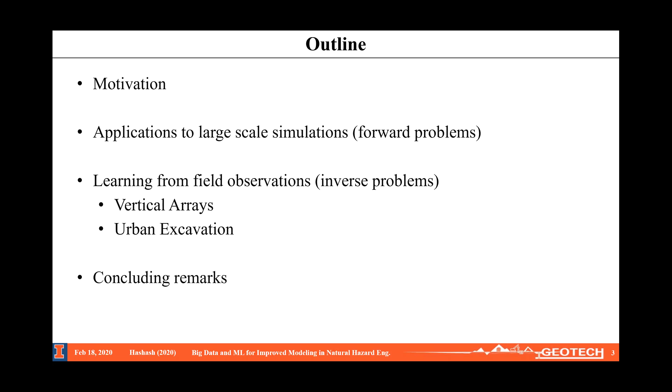First, I'm going to give you motivation. Then I'm going to apply it to a forward problem using large-scale simulations, learning from field observations, inverse problems. And I'll have two examples, vertical arrays and urban excavations, and then some concluding remarks.

So what's the motivation? The motivation is nowadays we're able to do ever larger, bigger, massive simulations. And the idea of asking our students to get the data, put it in an Excel sheet and come up with some correlation is really not viable. You've seen the machines here. We actually use them extensively. We're able to generate very large data sets. What can we do with this data set to be able to develop reliable risk-based design and models? We'll talk a little bit about that.

We're acquiring large data sets from the field, and are we using that data to improve our knowledge, to improve our understanding of the fundamentals of material behavior? And I'm going to talk a lot about simulation. We have centrifuge experiments, instrumented buildings. We're looking at using smartphones, terabytes and petabytes of data. What do we do with this? And so let me give you some examples.

So the first one is large-scale simulations. This one is motivated by trying to characterize the site effects for earthquake problems, the impacts of sites on our ground motion. And if you're doing a regional study to incorporate the information in a hazard map, you need to incorporate many, many different realizations and then come up with amplification models.

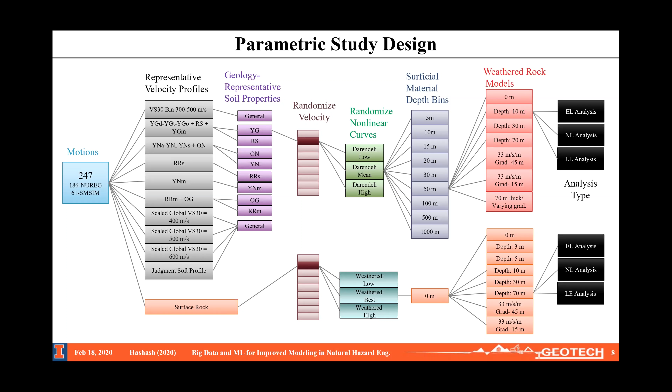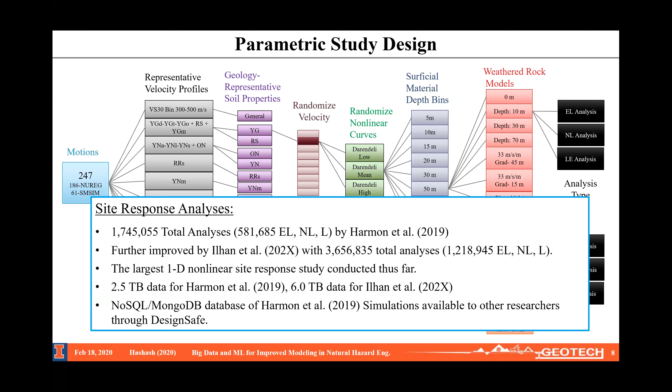The simulation study we have dealt with is very large, to incorporate ground motion effects, soil profiles, material properties, depth to rock, and that resulted in 1.7 million simulations. We're doing a newer study now with 3.6 million simulations, and the output from those is 30, 40 million, and we have 6 terabytes of data. The first set we had 2.5, now we're 6 terabytes, and we put this in a data set. So how do we use that data set in characterizing site effects?

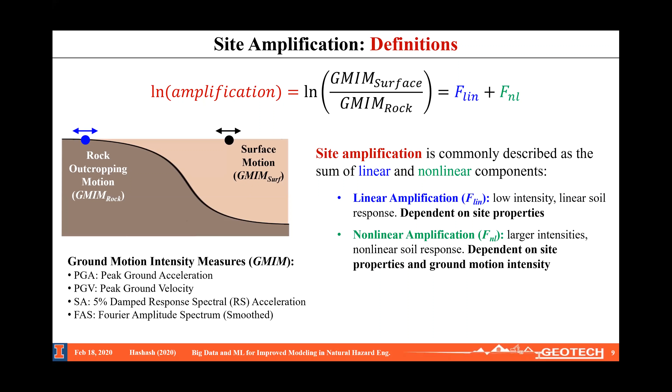We call this thing the amplification factor. You take the ground motion intensity measure at the surface, divided by some input rock, and that embeds, shall we say, the effect of the soil column on your ground motion. And there are linear and nonlinear components.

The functional forms, this is just to give you an idea about the complexity of these. The amplification factor is usually put as a function of shear wave velocity. We call it VS30. This is the slowness parameter of the soil column in the top 30 meters. And we develop these functional forms for it. And then we can add other terms such as the natural period of the soil column to enhance that prediction.

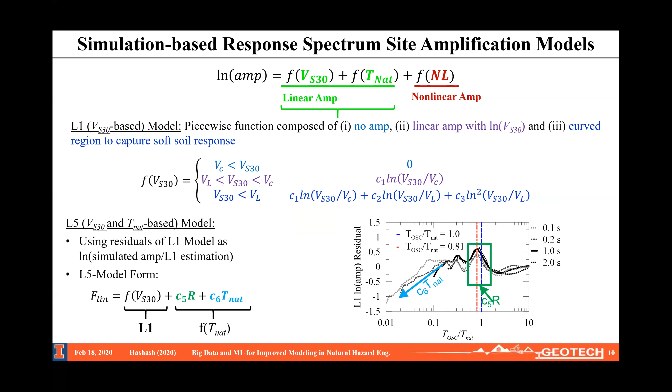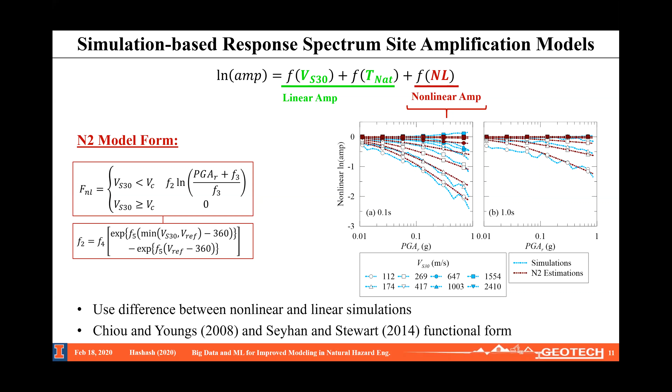The nonlinear form also becomes complicated. There are many terms that you have to bring in to be able to incorporate the soil nonlinearity into your model. And we have published these results. The measure of a model is how well it fits the data it is used to represent. This is a graphic showing you the residuals, and in a good model, you want the residuals to be centered on 0, right? And you can see that in certain parts of the shear wave velocity spectrum, we are really not centered around zero.

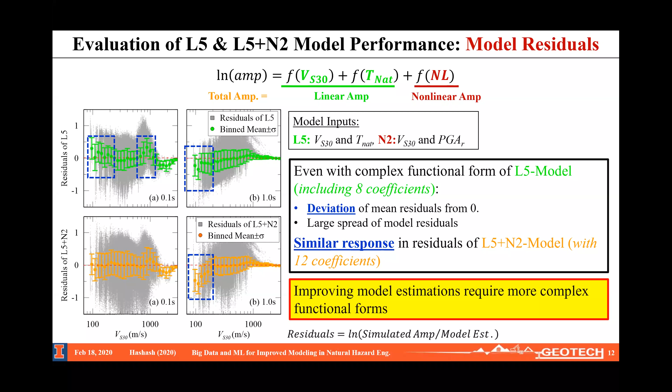So what do we do? Do we add more model coefficients to better match the data? This becomes really unwieldy, very difficult to do, and it's not easy to understand and figure out exactly how I can improve my model. Well, so what did we do? We decided instead of using conventional functional forms, we used neural networks.

The input to the model is exactly the same as any other conventional input we use in our site amplification. Why? Because we want this to ultimately be used by the community of seismic hazard mapping, and we do not want to change the input. Inside, there is a neural network, I think yesterday in the workshop you probably had a bit of an idea about what a neural network is, and then the output is also what they are used to.

The input is the same, the output is the same. It's just the inside we don't know exactly the functional form in a traditional sense. And I always say, do we really care? So we're able to have such a flexible framework or functionality to capture the data.

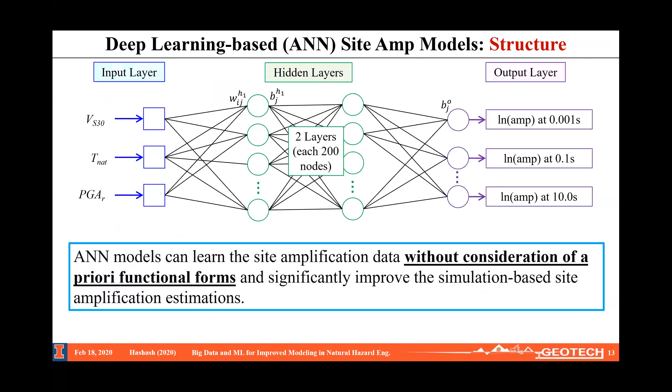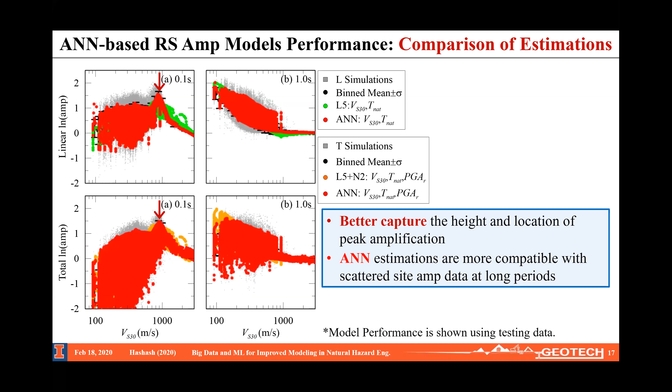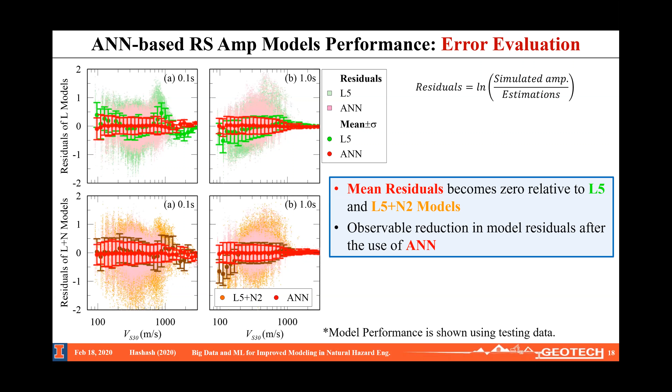And so what we did is then we trained it on the same data set that we used to regress the conventional models, the exact same data set, exact same thing. And we are actually doing a much better job in terms of capturing the trend and the width of the trend. And then if we look at our residuals now, compared to those of the conventional functional forms, they are centered on zero. And also the band, the sigma, is smaller, by the way. So this means you have a smaller error.

And if we look at it in a root mean square error, and this is for the linear function and the linear amplification and the total amplification, we have somewhere around 30% reduction of error. Now, why is that important? This is 30% in log scale, by the way. So from an engineering point of view, this reduction in error is massive. It's hugely important for us because it's giving us a far more reliable functional form to use for site amplification.

So it's an example of how we apply artificial neural networks, large data set simulation data, and put them all together to be able to improve our models that are used in engineering applications. The artificial neural network work is still in progress. We haven't deployed it yet, and we'll have to convince the USGS to ultimately use it as they did our previous models. But the error, you really cannot argue with the reduction in the error there.

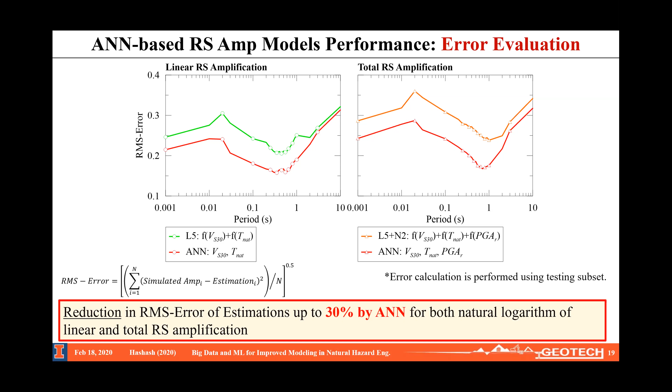Now, why do we care about these things? Because we're going for ever larger simulations. This is a large-scale simulation that we are currently working on with one of my PhD students, whereby we're looking at the interaction of tall buildings with tunnels, underground structures. And we want to build three-dimensional models because we want to do 1- or 2-dimensional shaking. And if you're interested, this is LS-DYNA, and we're running it here on these machines.

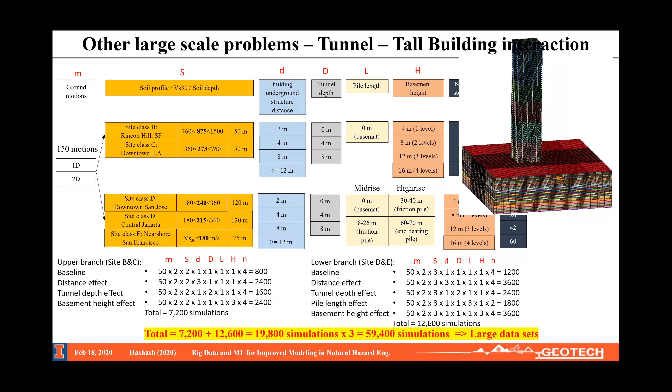We're going to have around 59,000 simulations. And if you know about finite element modeling, you have X number of nodes, X number of material points, integration points. So we're going to have a very, very large data set, and we plan to use artificial neural networks to be able to do our evaluation of these results. And ultimately, in how you carry that through in terms of your risk calculation, there's another project I'm involved with where we are trying to do that, and these tools will be very handy.

Okay, now I'm going to switch to another problem. The first was the forward problem. I'll give you an example of an inverse problem, learning from observations. This is self-learning simulation, a technique we have developed at the University of Illinois for quite a few years. And the way you want to think about it is, how can I develop a large data set from limited field observations? You see, our field observations, especially for the earthquake problem, are always limited. We have a few points here and there.

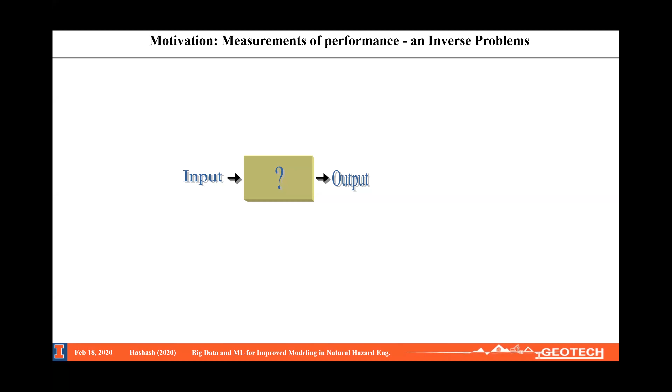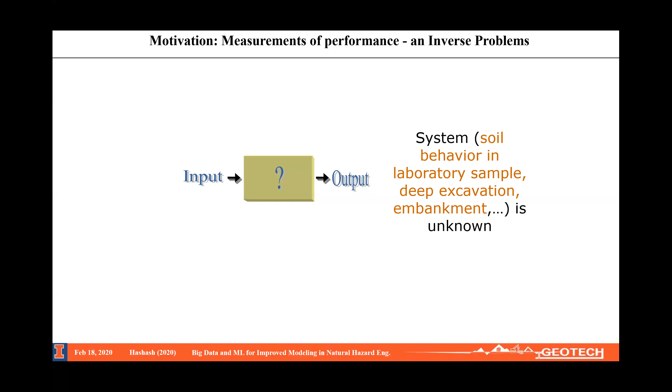But how can I get something more out of that data by bringing in other considerations? So we have an input and we have an output, and we do not know the guts of it, the mechanics of the problem. That's the unknown for us. That system behavior could be material behavior, a laboratory sample, a deep excavation, vertical arrays. The way we often do our modeling is we have a finite element model, we have a mesh, and we have a material constitutive model, linear elastic, nonlinear hysteretic model.

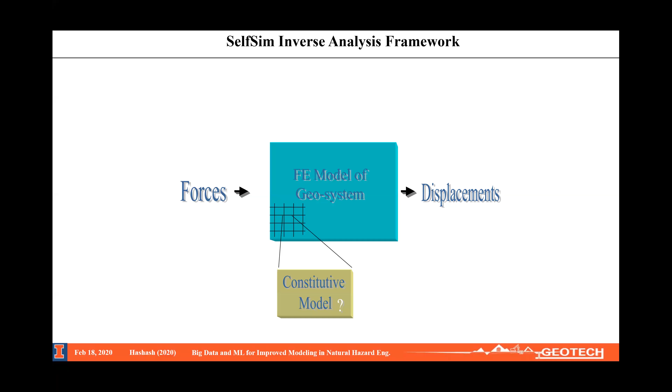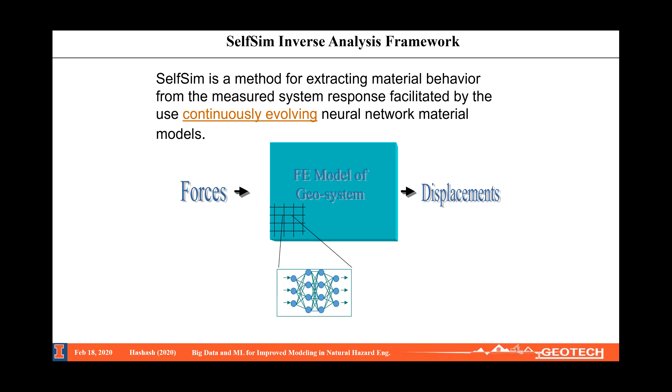Now, we have a force and we have a displacement. We have our constitutive model. Especially for geotechnical engineers, that's the unknown quantity. And instead of using a conventional hyperbolic constitutive law or a bounding surface plasticity model, I'm going to propose that we use a neural network-based material model, not a conventional material model. Why? Because if you look at our literature, the constitutive models out there are a dime a dozen. I have contributed my fair share to those models as well. But changing to that requires a change of thinking. So let's look at how we're going to do that.

So I'm going to take vertical arrays. With vertical arrays, you put some sensors at the ground surface and within the soil profile, and you have a shaking event, and you are able to see the wave propagation, and you try to simulate it to understand the material behavior. Well, it is fundamentally an inverse problem. If we use our conventional models, I have a fixed form of my constitutive model, and I try to tweak it and do some ad hoc changes.

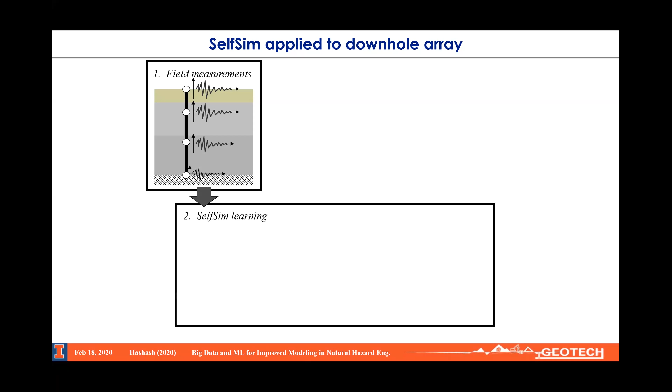We call this optimization. You run into uniqueness problems, etc. But there is more information in these models that we can do a better job extracting. So instead of running a single forward analysis with this, I'm going to suggest that I am going to do 2 simulations, right? So I have the records from all these points in the vertical array.

And what I'm going to do is I'm going to first run one simulation here, whereby I'm going to impose the base shaking. And I'm going to say there, because the forces that I'm applying are reasonably correct, then the stresses I'm getting out of it are correct. So I'm going to take these. The strains may not be.

Then I'm going to do another analysis, a parallel analysis, whereby I'm going to put in there all my measurements. And that is going to constrain the problem, whereby I'm going to, more or less, probably get my strain correctly. So I'm going to stipulate that I'm going to get the strain from that analysis. Stress, strain, that's a constitutive model. That's a material constitutive model. It relates stresses to strain.

So what I do is I take that data, but how can I use that? How can I incorporate it? Instead of using a conventional material model, I use a neural network model. From these 2 analyses, I train my neural network soil material model, and I repeat the process. I keep on repeating. I start from something similar to a linear elastic, and I let it evolve, and then I repeat that for all the time steps, etc.

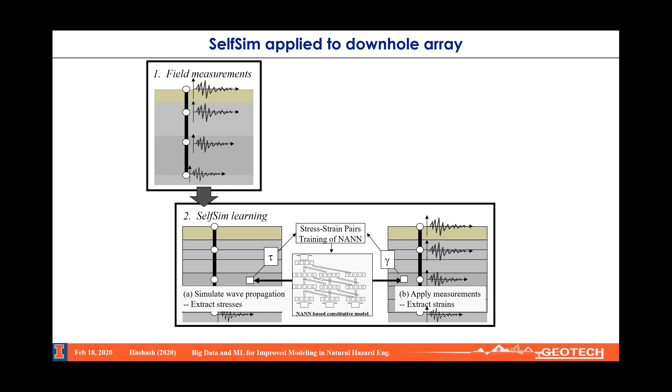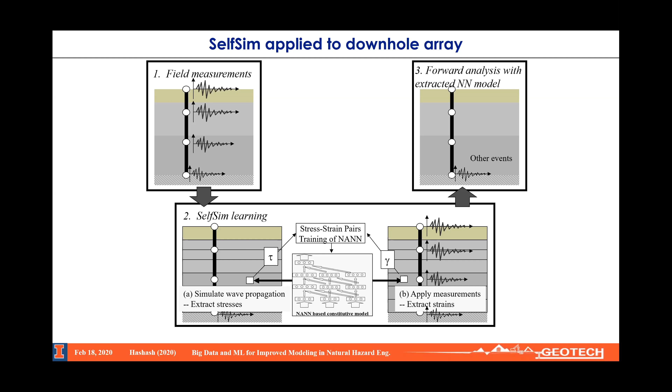You can see it can be computationally a bit demanding until the 2 analyses converge, and then I can say I have extracted out of the measurements enough knowledge that would be sufficient to tell me something reasonable about the material behavior. For your information, we've applied this to multiple problems, structural engineering problems, geotechnical problems, seismic and static. We've applied it also to bioengineering problems as well. And they all work really well. So there's a number of PhD theses on this. I'm just showing one example here.

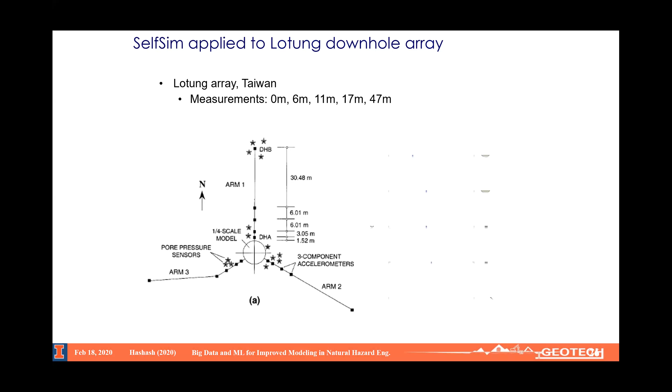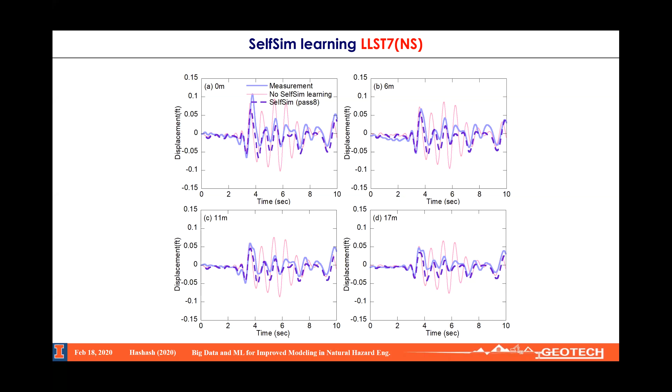Okay, so you say, well, you've matched, but what did you get out of the material behavior? Well, we looked at our soil stress strain loops. They looked reasonable, but let me show you something more. We started looking at modulus reduction and damping curves. This is a classic way of looking at material behavior that we use in site response analysis. Well, what we found is that first we got reasonable modulus reduction and damping curves, even though we didn't use those as an input.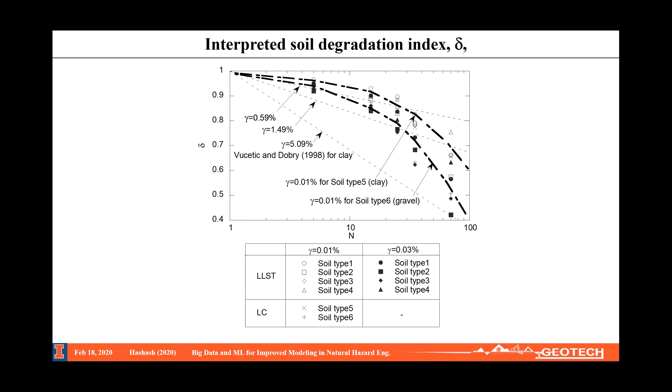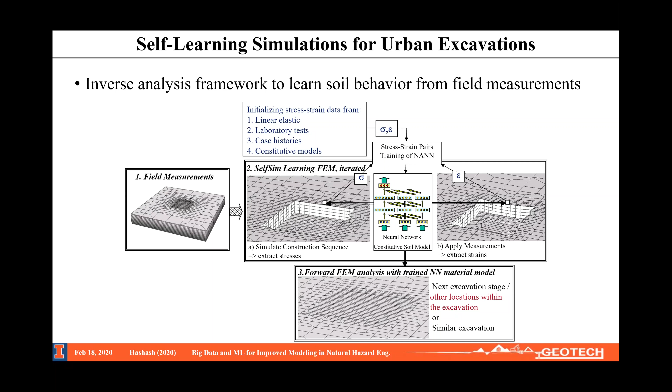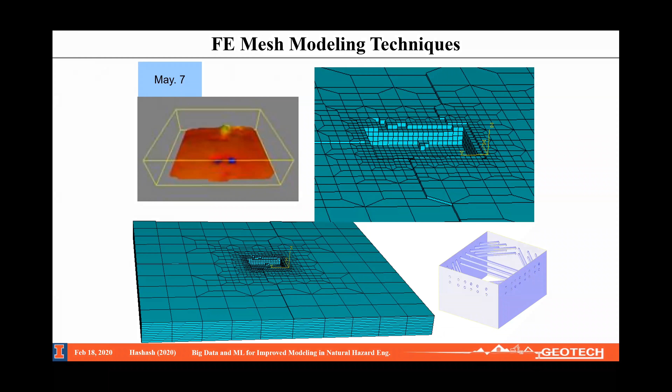I'm going to fly quickly through another example, and this is really to show you how we can incorporate things such as LiDAR or structure from motion information to develop our finite element models and then do this inverse analysis. We did that for an excavation problem, which we automatically converted to a finite element mesh, and then did our learning, and we learned nonlinear behavior. Conclusions.

The age of big data and machine learning is upon us, resulting in improved forward and inverse modeling, learning from observations. We need to shift our thinking, actually, think differently. There is a pressing need, in my opinion, to upgrade our toolbox and adapt available tools developed by others. Our friends in other areas have done a fantastic job. We want to learn how to just be good users of those.

We need a focused and systematic shift in our undergraduate and graduate education programs to move beyond traditional approaches for interacting with data and information. We have to start them young, okay? Change their way of thinking. We're a little bit too inflexible sometimes in how we think about it, because we don't realize how embedded certain procedures are in the way we do things.

Real data remains sparse and imperfect. There's a need for improved field data acquisition tools and sensors. I'm always a big believer in getting data. Geologic and geotechnical data is often quite limited. For large-scale 3D models, we need to keep that in mind.

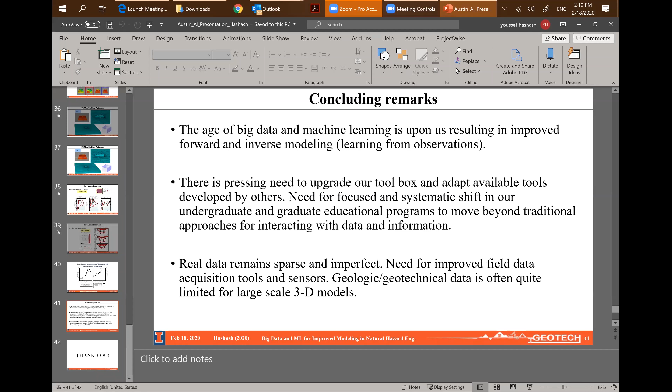Okay. It says, hello, I have a question regarding the accuracy of machine learning models. How do we determine the base error for most of the problems we handle in civil engineering, without which can we comment how good our machine learning models are doing, especially when we do not have any such accuracy parameters in other analysis methods? How can we do a generic comparison? I mean, for the models based on real-time data, for example, post-earthquake damage estimation using existing models versus machine learning.

Ten questions. Okay, yes, quite a few actually. That's great. Thank you, by the way, for the question. Do you want to take a stab at some of these? And I'll express some thoughts on it. Yeah, I can. Please, go on.

I can provide some perspective from at least the use of numerical models. You generally go and perform cross-validation. I think you have to be careful always with cross-validation because many times it overestimates your error. But in general, that's the main tool that you have. You know, some statistical version of cross-validation, bootstrapping, jackknifing, and then it's up to you to figure out for your specific application what's the right statistic, either that's correlation coefficient or maximum error, but that really depends on how you want to use your surrogate model. So there is no global answer about what is good error and what's not good error.